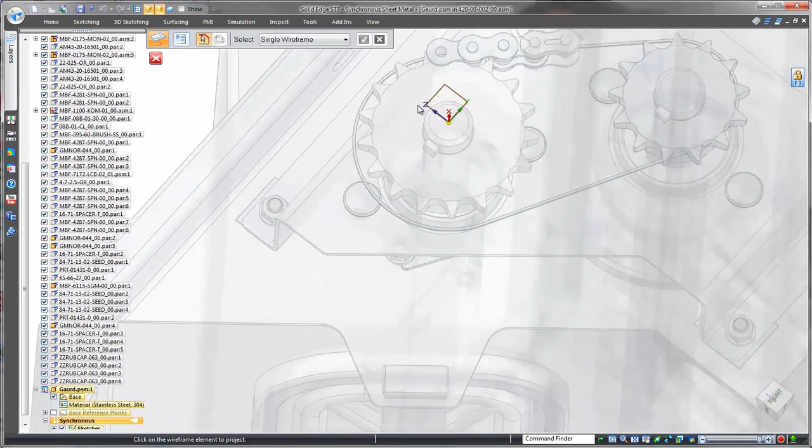Solid Edge excels with large product structures, and designers can work efficiently in the context of thousands of surrounding components by quickly focusing on a subset of the overall product. Here, watch as construction of the safety guard begins as a sketch, referencing geometry from the adjacent product structure. Once we have a region encompassed by these curves, we select it to create a sheet metal tab. Solid Edge automatically assumes that a tab is the basis for sheet metal work, so no specific command is needed.

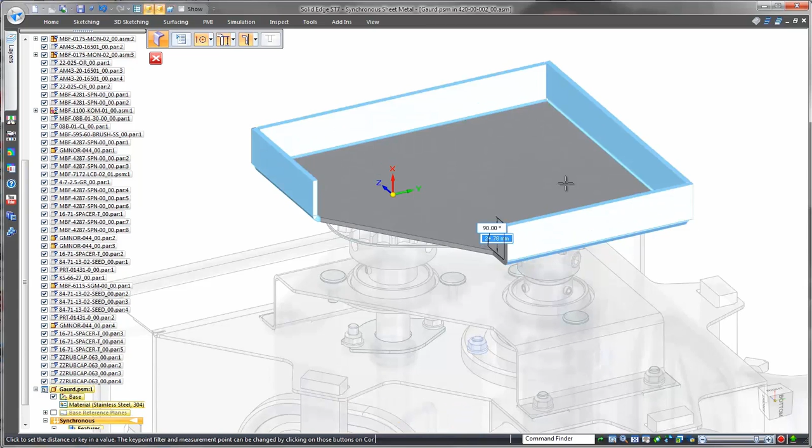Continuing to lean on the inherent intelligence within Solid Edge, we'll create 4 flanges by selecting and simultaneously dragging appropriate thickness faces using a corner point from another component to define the flange length. Again, work directly with geometry. That's creation in Solid Edge. We'll quickly define a jog to prevent interference. Solid Edge commands are intuitive and fast.

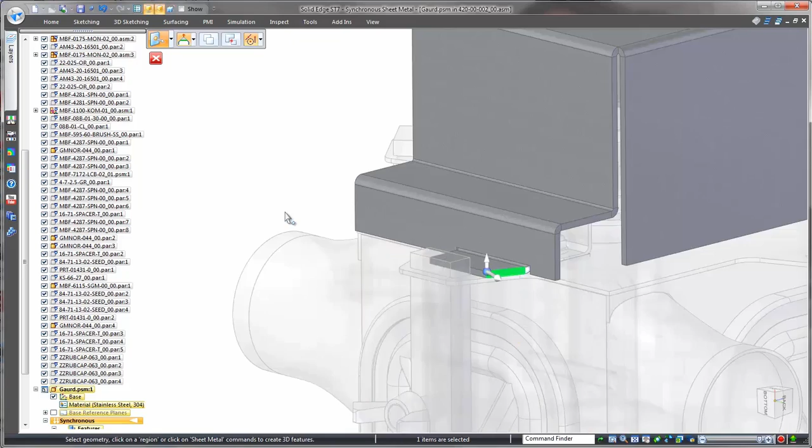Partial flanges can be defined and customized via the innovative heads-up command interface. Design intent is incorporated by relating faces. When flange sides need to match those from adjacent components, the handy radial menu initiates a simple sequence of picks to get the job done. Solid Edge makes easy work of reorienting and extending flanges, often removing the need to measure angles and distances.

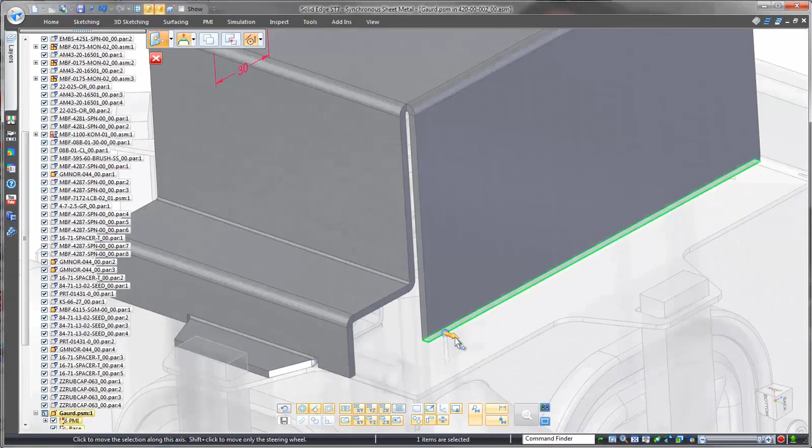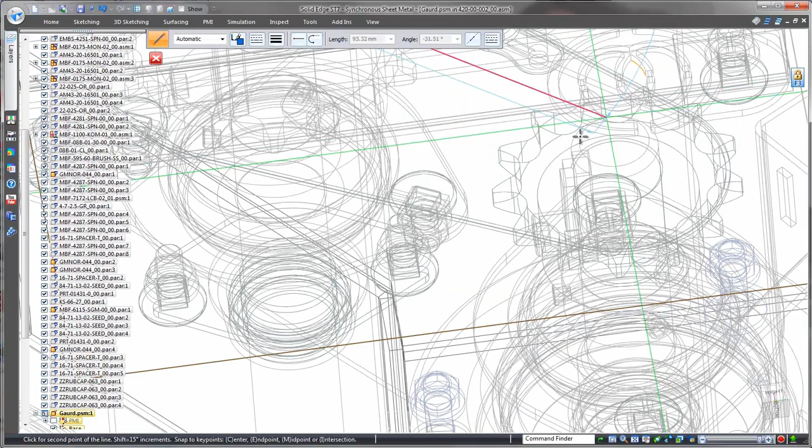For visual face modification, the handy steering wheel is always available. And when driving dimensions are necessary, it's easy to place them on the 3D geometry and change them as needed. Using surrounding geometry, creating sheet metal features like this dimple is fast and accurate. For manufacturing purposes, Solid Edge flat patterns always show the most efficient cut sheet size, and that's great for nesting.

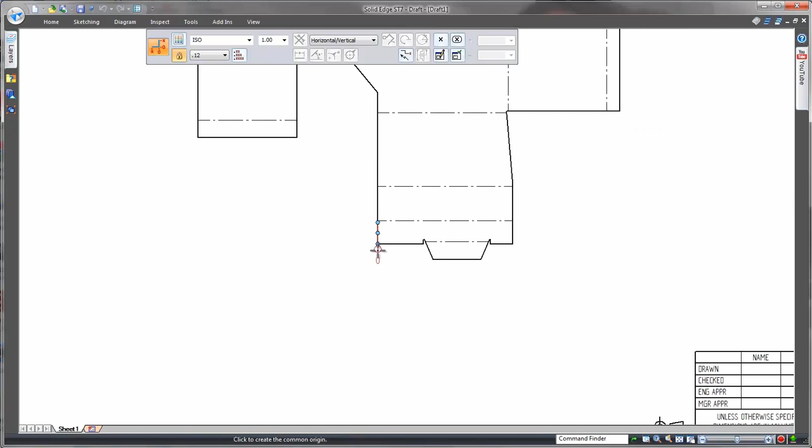The Solid Edge drafting tools facilitate creation of dimensioned drawing views fully associative to the model. Note that as we close the drawing and return to the assembly, the guard is placed in all 3 locations in the meter box. Solid Edge contains a full set of sheet metal construction commands. Watch as a rectangular to circular plenum in the blower fan assembly is lofted between existing parts.

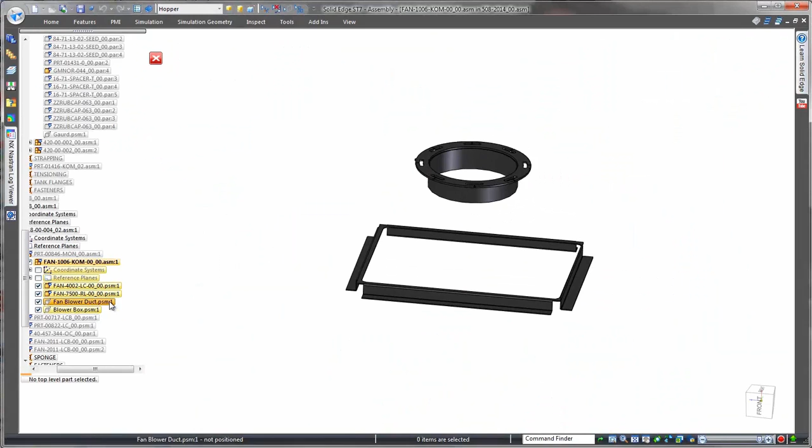Another strength of Solid Edge is the ability to wrap sheet metal around a solid part. This conversion of solid block into sheet metal is especially useful for complex shapes, as solid modeling is often faster and easier. Now that's productive. To integrate with your CNC machinery, Solid Edge flat patterns can be exported into a DXF format with intelligent layer control.

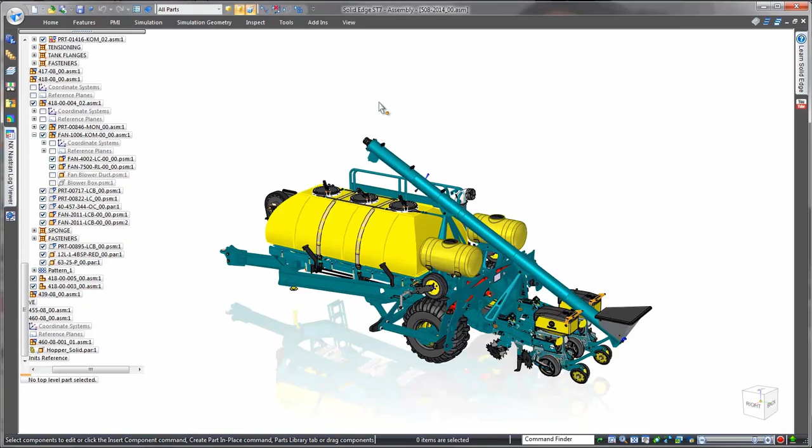Direct interaction with surrounding geometry, coupled with industry-leading design tools and innovative modeling capabilities, makes Solid Edge the choice for companies looking for an edge over the competition. Solid Edge. Design better.